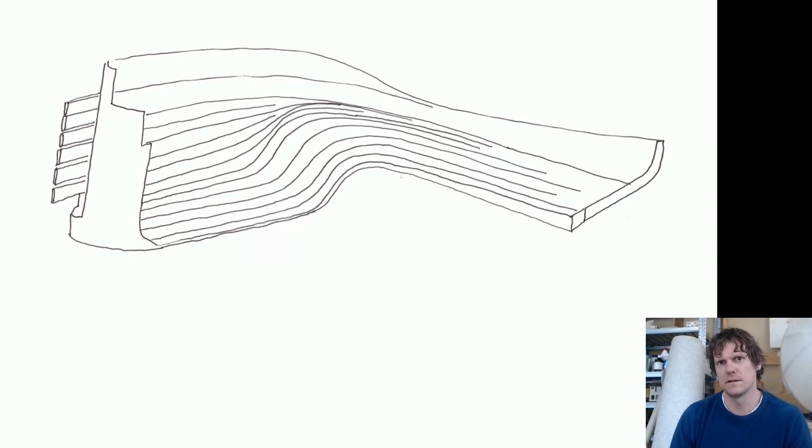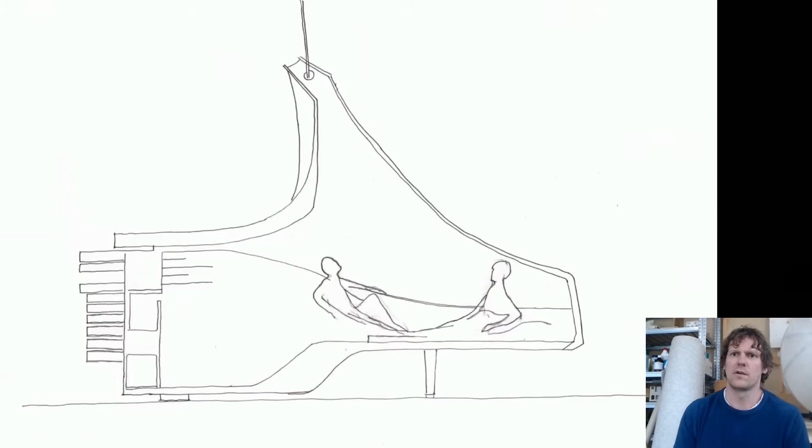On top, in this case, we use felted Nuno wool - a very thin silk material - and then wool on each side, softly blended together. In this case they create a veil on top of the bed.

This was identified very early by the destination developers, that having this kind of honeymoon suite would have great appeal in an international travel market.

So what we did now is, this is still visualizations, and this is kind of the end of this pilot project. Then a local hotel came and bought the idea. You can see in this image that the way the project was developed there was very sculpturesque. It demanded a lot of space around it to become this centerpiece in a room.

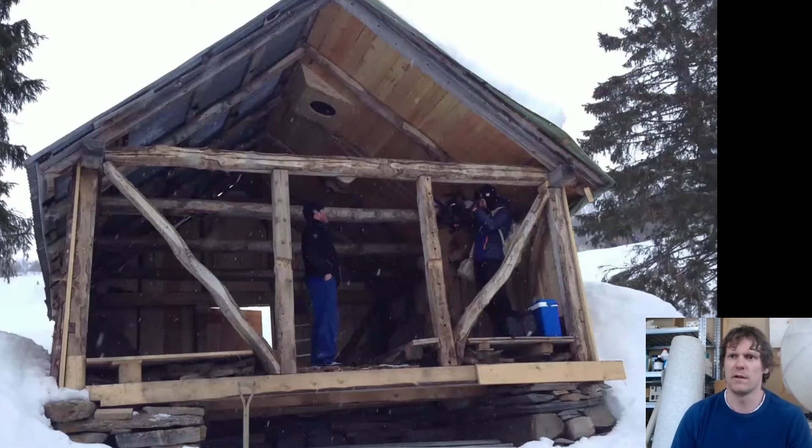The barn that we eventually got was far from the same size. You could almost not stand upright. So we needed to rethink the strategy, but we sought to combine aspects of these different typologies that we had developed in the initial phase. Like most of these places, the entire building is very crooked, nothing is plumb or leveled.

Because we wanted to expand and use as much space as possible, we needed to measure everything and translate all these measurements to our workshop, where we started to make this shell. These are the roof rafters and the beams on top of the walls. Every imperfection, everything that's slanting, we measured and put into this workshop, and then we started to make everything as modules.

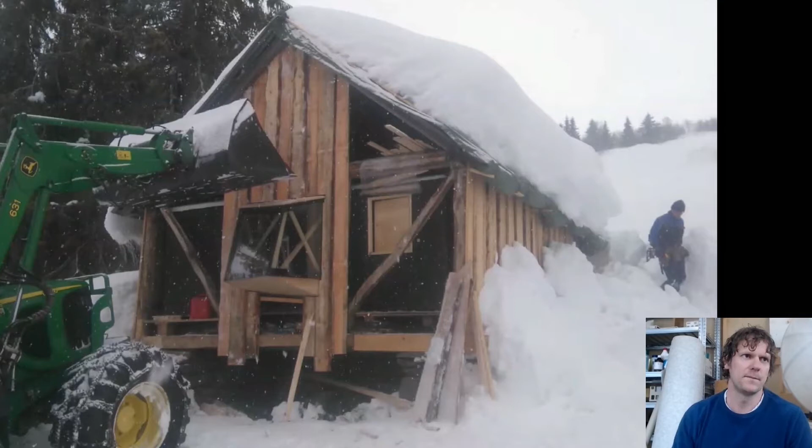We made it as a ready piece, flat packed, and then we brought it by tractor. This is also showing the intention of the project, which is to give these people a reason to keep their buildings intact.

So this is the actual owner on the right side. He owns this barn. He sold his land, part of his farm, to a ski resort, so he has more money than he can ever spend. He has a lot of these barns too, but no reason to keep them. The moment the hotel wanted to rent his barn and put this module into it, he started to change the cladding and the roof, because then there's some use for it.

So as I said, the new project needed to fill this void in a much more precise way. Even the small gutter in the center, we utilized in order to gain height in this module. Usually on each side there was a cow, and they would shit into this gutter in the middle, that's why it's deeper, so you could just shove it out. We made this fit into that, and then we had this entrance like a moon door.

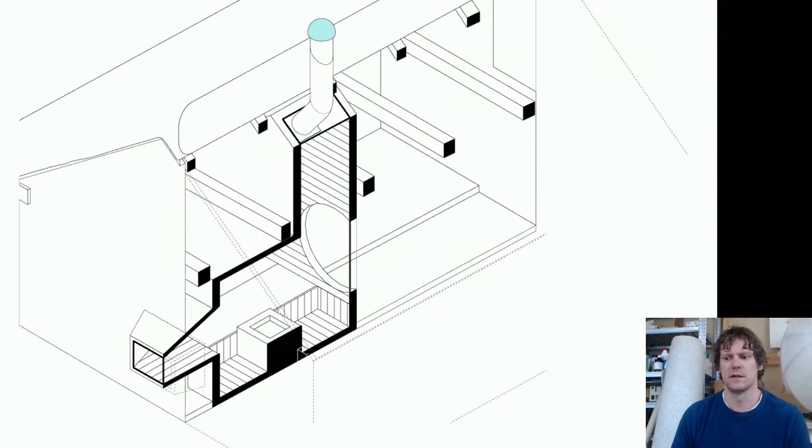There we can see how the module relates. To us it was extremely important to keep a big part of the existing space as an actual space, so it would be the experience of going into the original. Here we can also see these slate stones, this is where the hay used to lay, so the cows would face this hay and graze.

Here we can see these slight nuances, it's much lighter and more refined, the one that we add, but it's the same material and comes from the same forest as the existing one. It's just slightly less crude or coarse in the detailing and the materiality.

And here is the threshold between what we added and what was already there. You cannot stand in this space. That's also why we wanted to make this entrance, like this moon door, something other than a regular door, so going through the opening you would have to respond with your body, come down, and you're asked by the architecture to take a seating position and be on your knees on these tatami mats.

This is Marina sitting in this module. We also added this very small heat source where you can cook a pot of tea, lit with some kind of special candles. If you close the door, even if it's 20 below outside, because of the confined space, it doesn't become less than 10 degrees, even in wintertime.

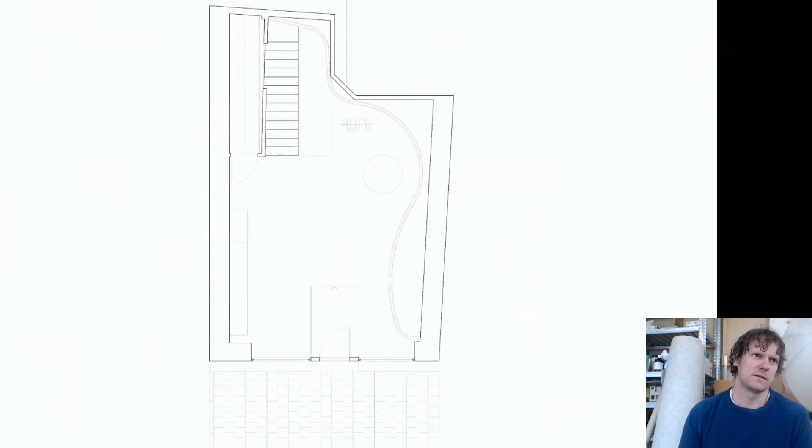So we wanted the top one to manifest this kind of social arena. I don't know if this is too light for some of your screens, but you go in and you have this fluid wall, and it creates this mezzanine where you have the staircase taking you down to the basement. And then there's also this very slim space next to it.

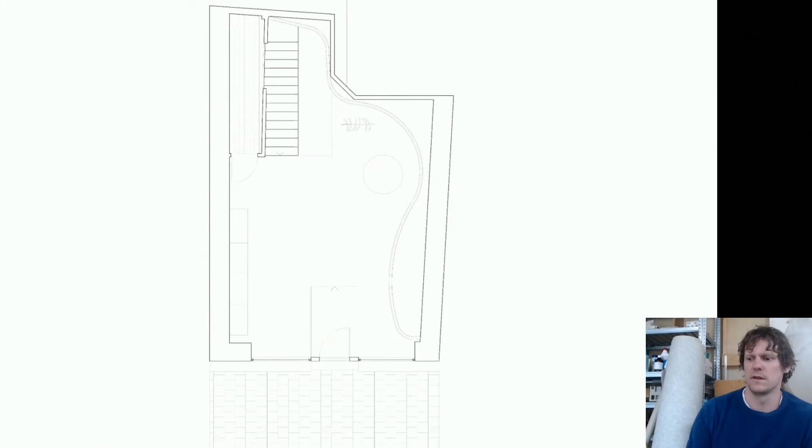It manifests, it stages this meeting. You go there with your friends, you try on something new, and then you show yourself to whoever you are with.

And get some feedback. We wanted to manifest that, and in addition, we wanted the basement to be like this flexible space, as this is also a part of having a retail shop or retail space. Now it has to be kind of like a showroom.

In their case, they have one shop in Oslo, and then one shop in the US that we also designed last year. But apart from that, most of the shopping is done online. So they have to bring everybody together, everybody who wants to experience their brand.

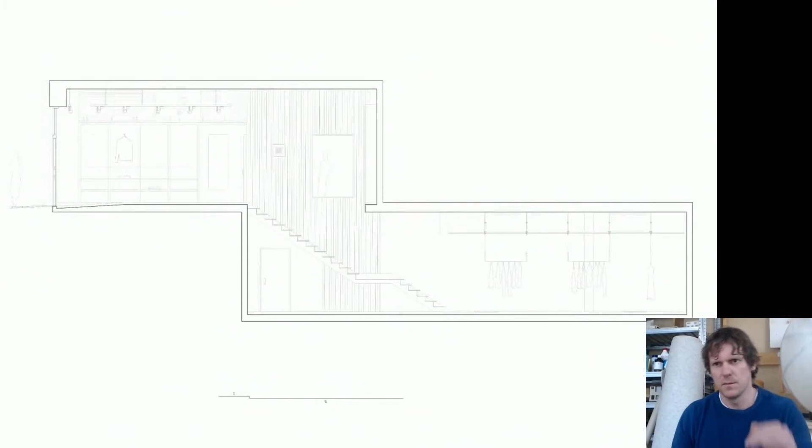And they wanted to be able to do these ceremonies or fashion shows, these catwalks. So we designed the basement with this very flexible ceiling and very open space on the floor, where we made this pathway that's always part of the floor.

And then we wanted to take away this cellar feeling, this subfloor feeling. We introduced this very light ceiling. It consists of fabric, and behind that there's a lot of LED lights in strips, made so that the light cone overlaps.

So you would have this completely perfect lighting ceiling, and hanging down from those are these hooks where you can hang this flexible hanging system, and also as you may notice, the sprinklers are painted in the same color and go into the grid and the rhythm.

So it's nice to work with these kind of high budget retail spaces in order to experiment on the detailing and devote ourselves to this kind of detail fetishism, and then maybe bring it out into more real world application as well.

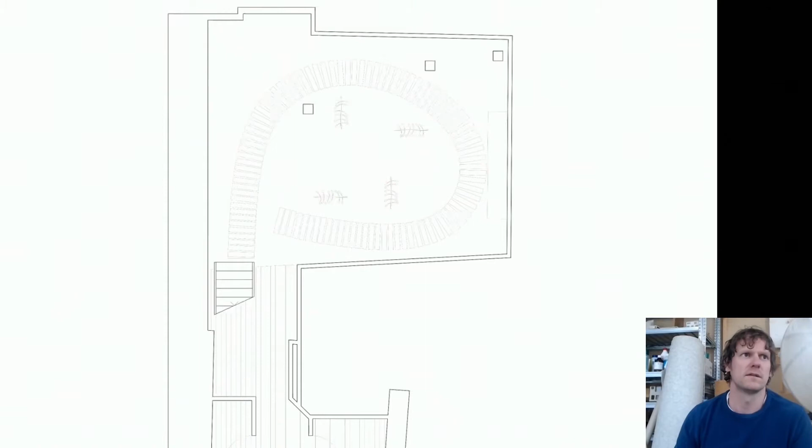You can see the plan with this catwalk embedded into the floor, this flexible hanging system, and there's a detail from the oak floor. It's kind of like this earth, rammed earth floor, where it's just rammed into it, flush.

And a very important part of it is this kitchen cabinet that normally just sits in the back, but it can also completely transform this space into more of a lounge area, where you bring out some furniture and have a more intimate atmosphere together with some clients. So as I said, this is kind of something that we do less of.

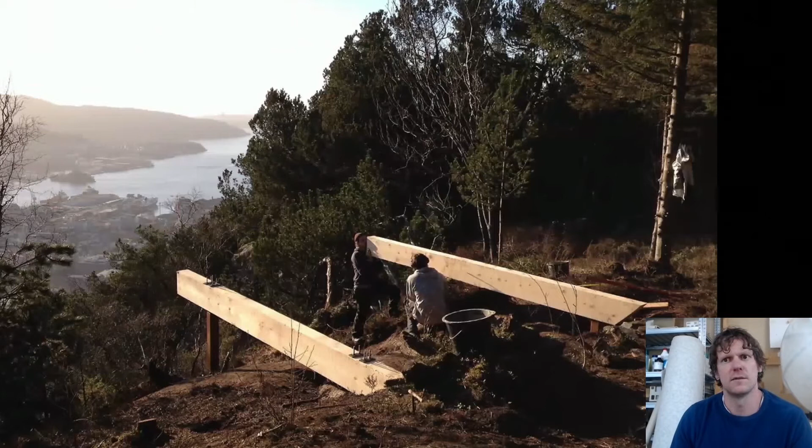What we do more of is some of these small projects in our own region. A lot of these are developed back and forth between us and the location.

This is a project we did 5 years ago together with students. We initiated it ourselves, and asked the municipality if, should we raise the money, we could make a guest room for the city of Bergen.

We had some issues landing the deal, but in the end we said that if people don't like it, we would pay to remove it. We got funding from people who wanted to give this gift together with us, and we set aside money in the budget in case the government or local municipality decided they didn't want it anymore, so we could take it away. Then we got accepted.

We started going back and forth between the drawing board and the site, building some of the actual foundations before finalizing the design, and made a lot of experiments in the workshop.

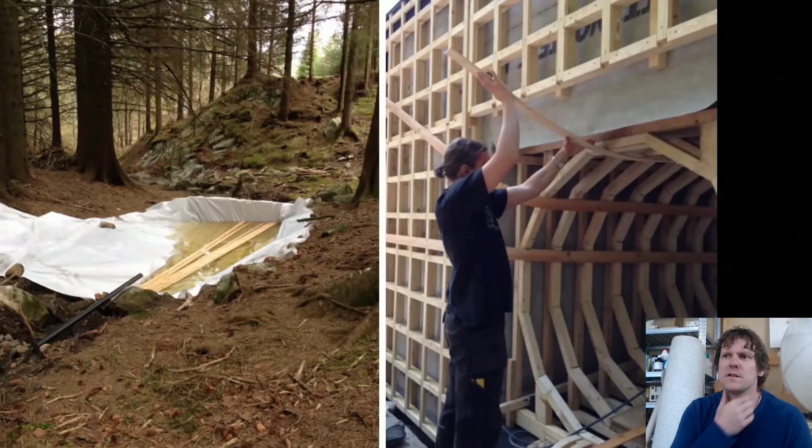We experimented at school, then brought it up and started to build, but the wood had different moisture and quality when we arrived on site, so everything started to crack. These are some stories from the building process and how we made it.

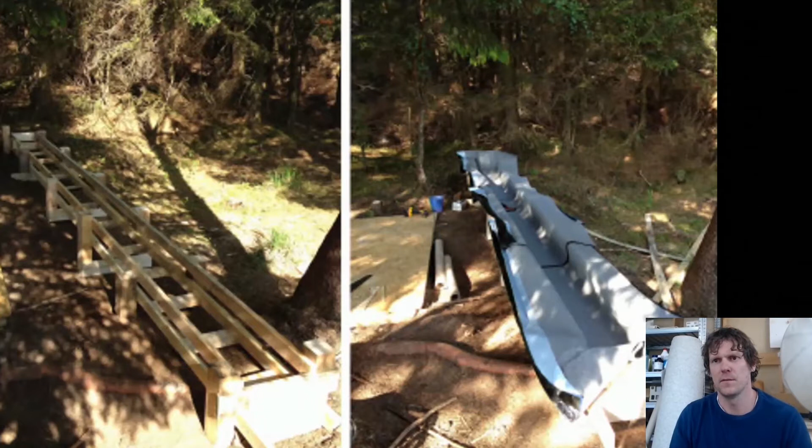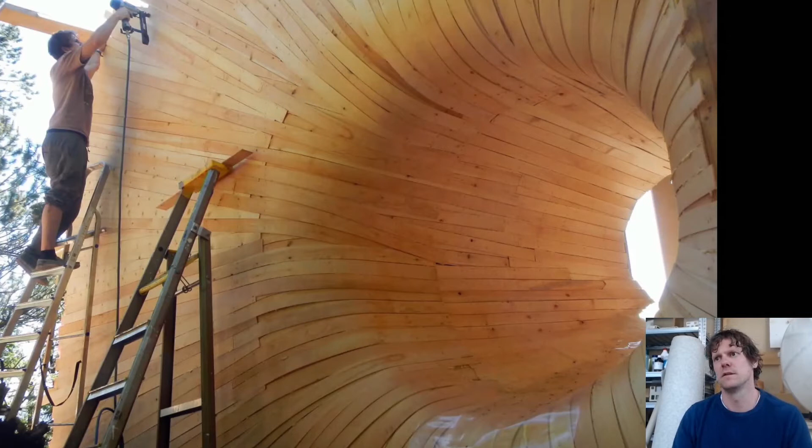In the end, we had to make a kind of hot tub for all the boards. We had an old heater that we dismantled, took the heating elements, and made something much sturdier so we could heat the water. Every piece of wood was first boiled, and while it was still like boiled spaghetti, we put it into layers on top of this entrance.

And you can see the freshly mounted entrance into this cabin.

As I said, one of the things we wanted to achieve was an appeal to the younger clientele, and we wanted it to be an attraction, a place you would visit even if it's closed. The way it functions is you borrow the key from the municipality, you have to go get it, and it's completely free of charge, so it's been very popular. But we still wanted it to be an attraction even if you didn't have the key.

You can see how the children run around, play, and enjoy this area. In order to take nothing more than we give, we also lifted it up, and then we had this lunch place where you have shade from the rain.

This is the interior, very simple, with curves where you have a mezzanine to sleep, and then you have a fireplace, and this is overlooking the city of Bergen.

There's a funicular, a cable car train that takes you up to about 400 meters above sea level, so this is extremely close to a highly dense urban area. It has now been rented out for the last 5 years and has been fully booked ever since.

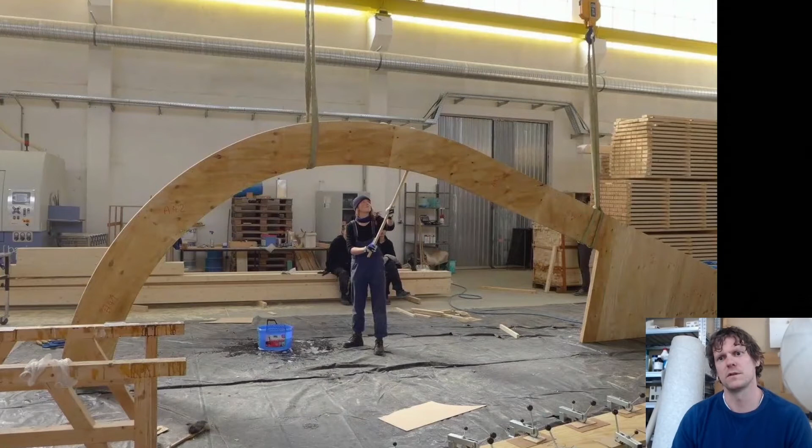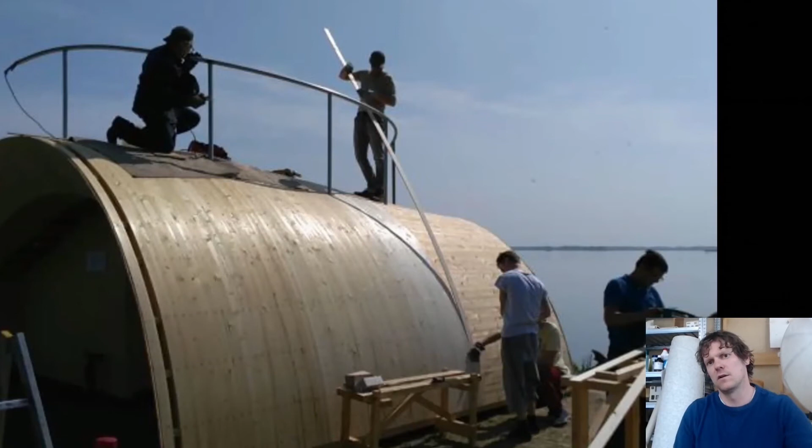And then we have these industrialized workshops where we could clamp everything and make these very precise shapes that made the building very easy. So you can see the vision coming to life with this wooden carpet. It's several layers of bent wood.

And in this case, the wood is just regular panels, thin panels of maybe 12 millimeters. So the bending is done without any treatment, because the curve is so big. We can have these very smooth shapes without doing anything, and it's very natural to this format of the wood.

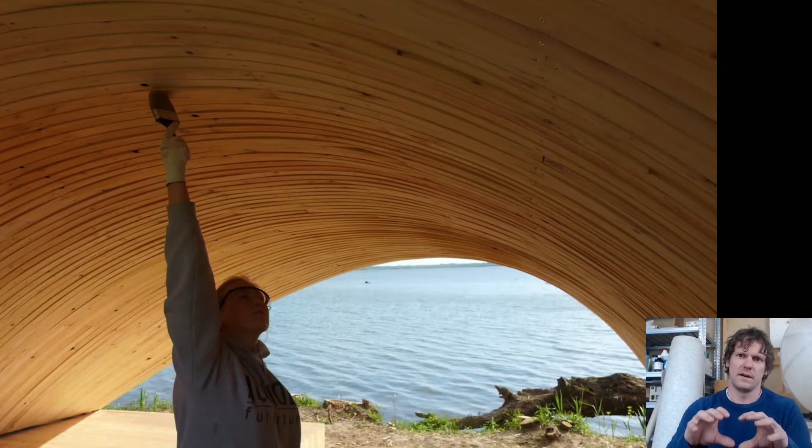The most important space maybe in this project is this covered cave, because the main client was these bird watchers. All they need is this dry surface and preferably protection from the rain, and also this silhouette in the background so the birds don't get scared. And they want to be as low as possible.

So they want to lay here and look at these birds. And then we insisted on bringing this to some kind of furniture that would also have appeal to everybody riding across on a bike, for instance. It's this very long official bike road that stretches along the Donau River.

It was also popular with the main target group that made these bird watching seminars. So it's connected to a professional bird watching agency that takes people around and brings them up to show them this very nice area.

And once again, the fashion industry wanted to use it. This is a local fashion blogger that sent us an image afterwards, which was funny.

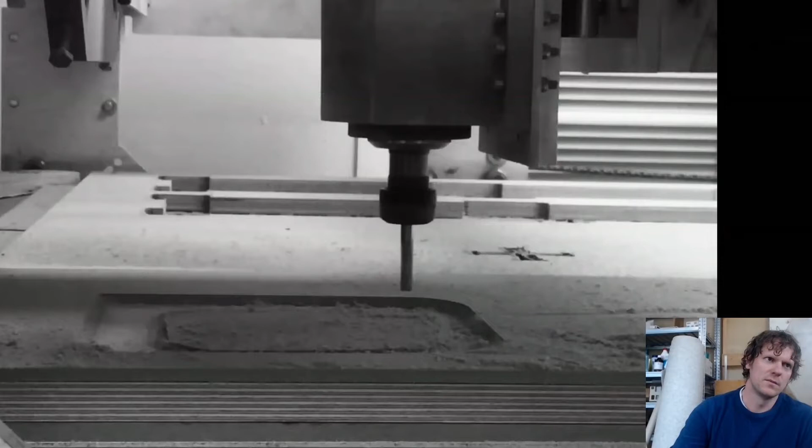In this case, we had to make our own CNC cutter, as we didn't have that already. And we found out that because the design is kind of this very soft gesture, it climatized this one space. And then inside that, we placed this sleeping box.

And I think that the architecture in every culture starts with this kind of gesture to climatize something. So either you protect yourself from the rain, you want to completely control the climate as we do now, or it starts with the need for shade even, or in our case, very often protecting against a certain wind. And the less we do of these fully climatized projects, the more we can appreciate these different transitions between the outdoors, like the nature, and the fully climatized, like 22 degree spaces.

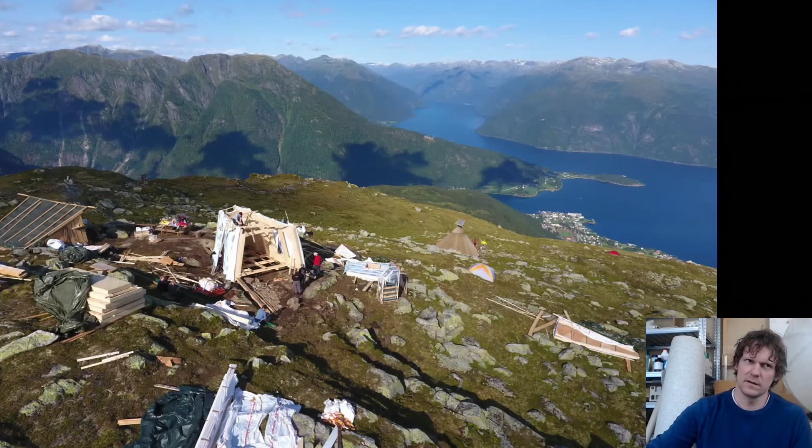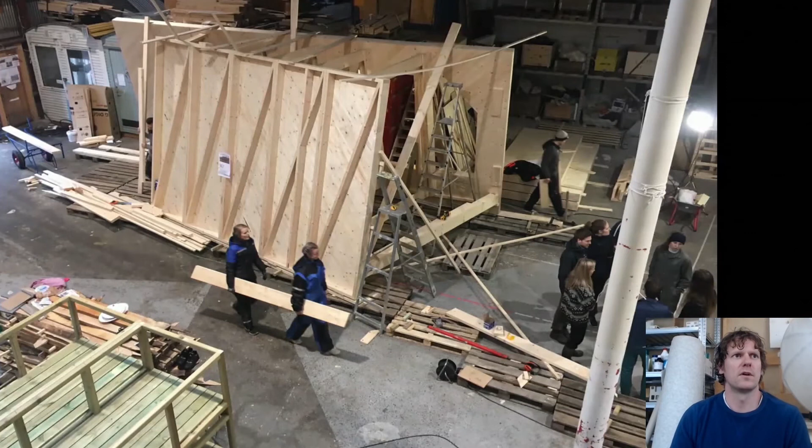We did everything ready-made in the workshop - made more or less the complete building, put insulation into everything, made it tight, and made it so every piece is manageable for 2 persons. You can see it's self-supporting; this is one piece before the insulation is put in. Then the entire mounting process is planned, and everything is flat-packed in reverse order.

At this altitude, we wanted it to be as efficient as possible. Once again, it's this notion of the architecture being very immediate when it comes to climatization - the architecture is a gesture to control the climate, a gesture to protect whoever is visiting from whatever rough climate is here. In this case, we have these two very heavy winds.

We have the southwest and northeast that appear at different times, so we always wanted to have this sheltered entrance area. We made this in a plan, like shifted parallel. They are not parallel, they are kind of a V shape, but shifted a little bit in relation to each other. So we get one sheltered entrance here that has this view, and another sheltered area here that has another view going out.

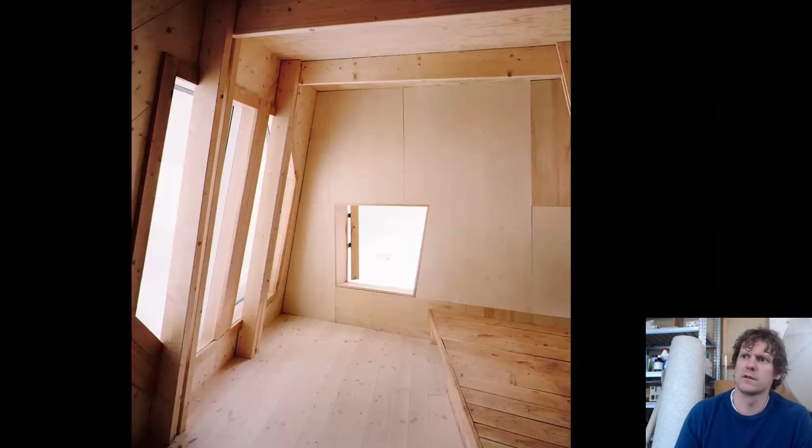We also wanted to work with this motif in the interior space, so you get this very sheltered feeling, even though this is more of a completely climatized space. We wanted to work with this atmosphere of being inside this ship's hull, where you feel the environment and in a way feel what's at stake.

And this is from the entrance, and there you can see down to the fjords. It's a very hazy day. We have two different entrances: one on this side that has this kind of counter, where you sit in the opening, and the other is more of a conventional door that you just go through.

And now I will show the last one, which is more conventional, something from the historic center of Bergen.

In this historic center of Bergen we rarely see new things, and when we do see new things, it's not necessarily very successful, I suppose. This is an extremely big yacht designed by Philippe Starck for Abramovich, this private structure that goes in and completely destroys this.

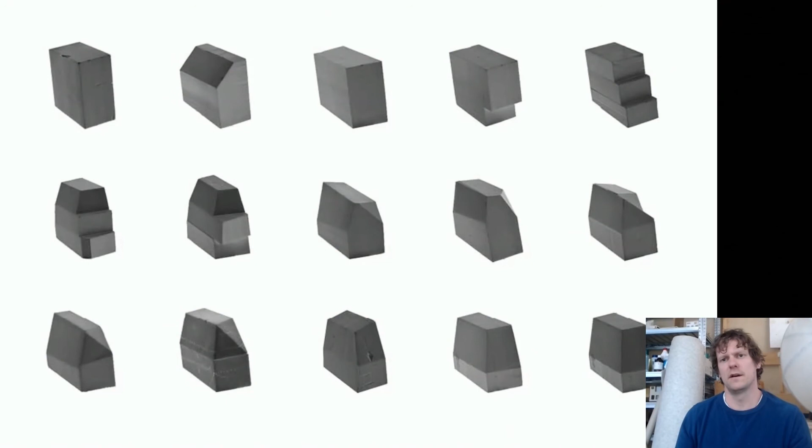So working with this situation, we needed to find an architectural language that would deal with this notion of public space, and that would also relate to the surrounding area. This is more of a conventional architectural model-making dialogue, where I think the conversation you have around these attempts is kind of the DNA of an office, and what you use to score these attempts.

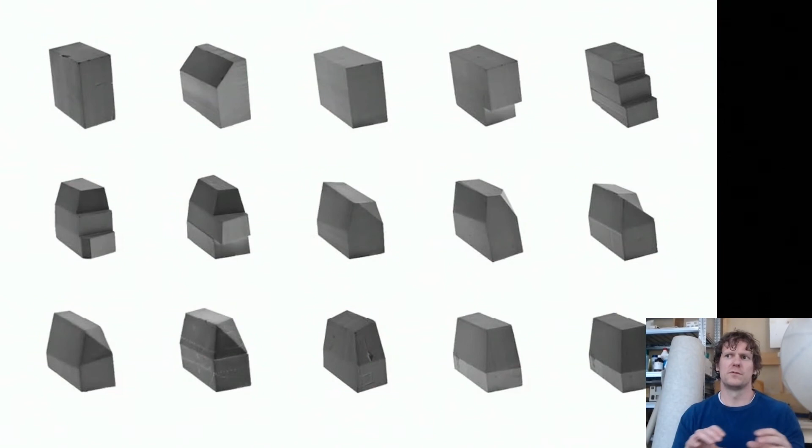So in our case, we used them to find out both how we could create good quality of space for the project, but also how we could have a shape that would relate in materiality and maybe also scale, particularly to the neighboring buildings.

So one of the first things we did was break it down so that our surfaces would all relate to the surfaces around them. So none of them would be bigger individually than any other facade or shifted piece of building that we see around us.

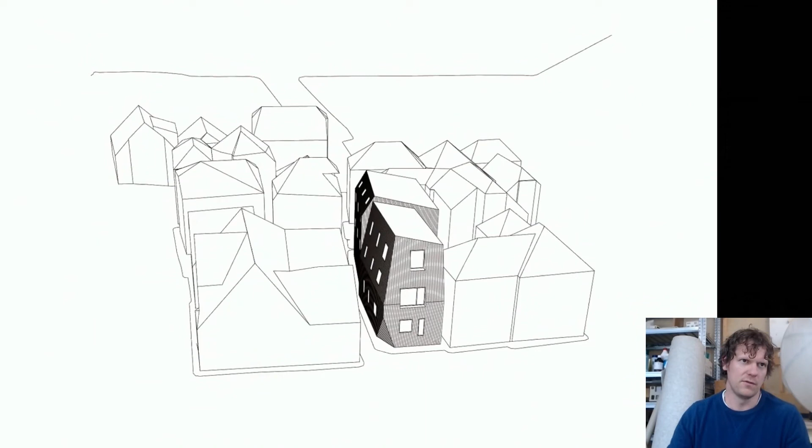We also did this action of separating the two volumes into two. They are connected through this piece in the middle, but they are also very much like two visually different buildings.

This also relates to the facade on the backside, where in the existing building you also have these two broken buildings. We took it a little bit back from the existing buildings to not destroy the detailing around the rafter, which is extremely important in these historic buildings.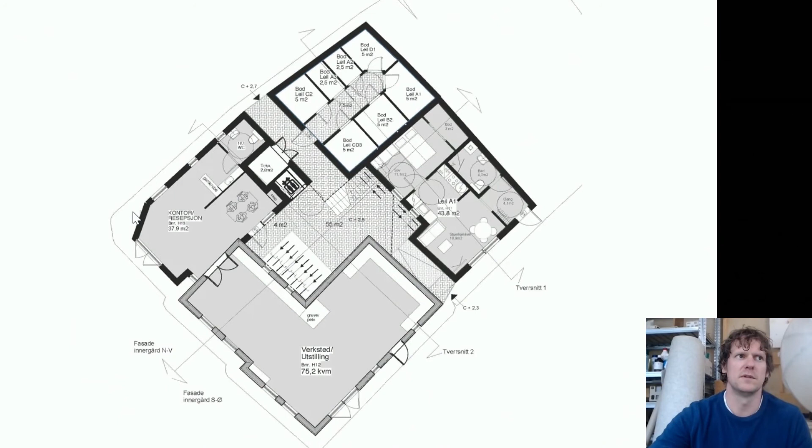So it's this architectural language of separating between this as a common area, and then you have the threshold, which is less inviting, and then as we'll see in the other pictures, we have public access to this side, where the architecture also steps back and invites in.

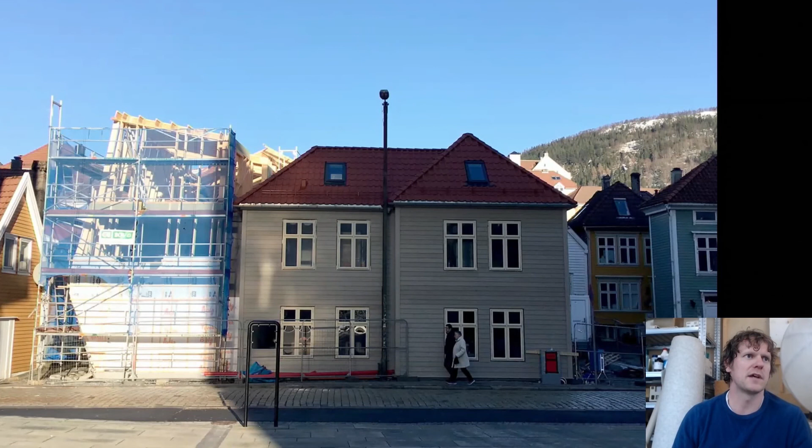So more of a conventional second floor and a very generous third floor. So we can see in the situation from the building, this was obviously extremely challenging to build, as the site is extremely narrow, and getting the trucks and the material onto the building site is very challenging.

It's also made completely out of wood, which is very challenging in terms of fire hazard and all of the technical demands, but in terms of the quality of architecture, extremely rewarding.